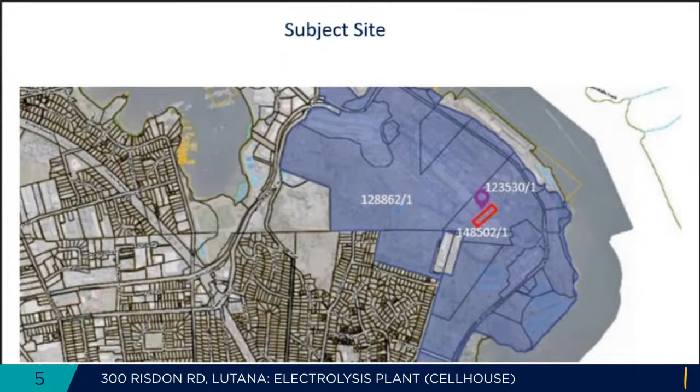So this shows the zoning. The zoning of the Nyrstar site is general industrial, and it's the same for some of the other large industrial properties, that's in purple. Then we have an area of green, that's open space zone land. That's also within Nyrstar, but it includes a woodland and some other open space zone land, which provides a buffer between the residential zoned land, in red to the south, and the actual Nyrstar site.

Where we have the yellow rectangle, that's a TasNetworks substation, and that's quite close to where the proposed cell house is. The use is classed manufacturing and processing. That's a permitted use within the general industrial zone.

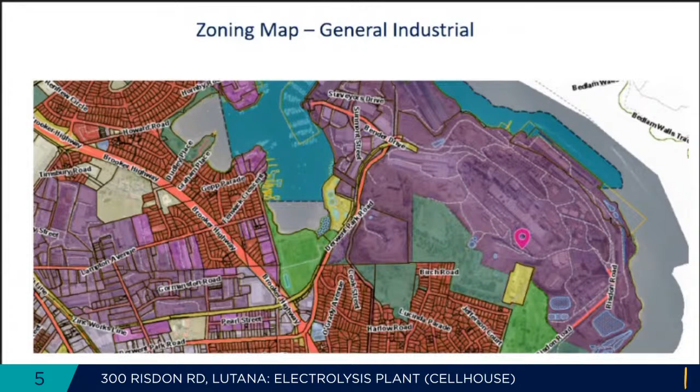Next slide please. So this shows the site plan. The yellow area, that's going to be the new cell house. And then we've got some associated development, which are cooling towers and a pipe bridge. The cooling towers are in blue and the pipe bridge is in pink.

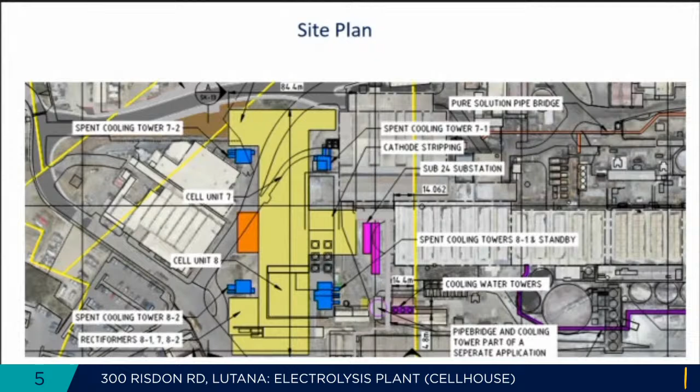So the application is discretionary because it's a level 2 activity. The discretion is under EMPCA. There's a small discretion in terms of the building height and the discretion in terms of car parking numbers.

So in terms of the level 2 activity, the environmental impact assessment report was submitted, and the application was referred to the Environmental Protection Authority for a level 2 activity assessment. So the board has assessed that component of the application, and they made a decision to approve it subject to conditions. That is the environmental impact part that they have assessed of the application on the 5th of April.

The council is required to attach the conditions of the board to any permit that the council would grant, and they are in the attachments, and it's quite a lot of pages that will need to be attached to the permit, and they are the environmental conditions that go with any permit.

We have a next slide, please. So I'll get now to the discretion of the height.

So the acceptable solution states a 20-metre limit. Part of the cell house will be 22.3 metres high, and the cooling towers will be 20.5 metres in height, where the acceptable solution has a 20-metre height limit.

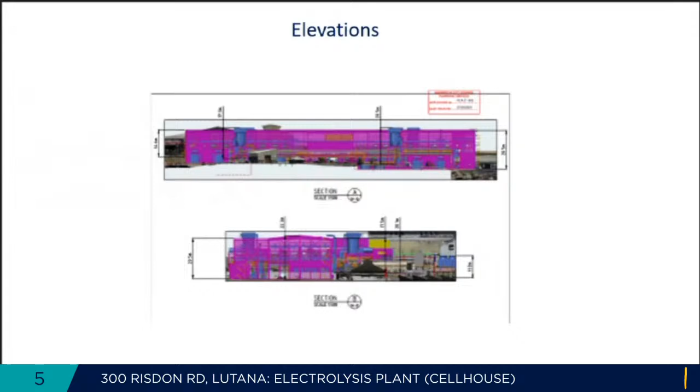So the height, actually, could we have the next slide? That might show it a bit better, please. So this is an isometric view.

So you can see where the development faces the existing higher buildings, that's where it is higher, and also in the middle of the roof where there's a pitched roof. And it starts at 11 metres where the adjoining building is lower, where it sort of faces Risdon Road. And so the narrow side presents to the water, and the higher side is adjacent to other buildings that are of similar height.

The performance criteria requires that we consider the bulk and the form of the building, separation from existing use on adjoining properties, and any buffers created by natural and other features. So in terms of the assessment...

It's considered that the additional height would not substantially add to the bulk and form of the building, and that the bulk and form of the building would not be excessive. Also, it's considered that the building would sit amongst other large buildings and would present with the narrow side to the river, which would minimise any visual impacts.

In terms of the separation from the nearest residential property, that's nearly 300 metres. That's quite a long way away from any residential property. And also for the third criterion, there is a buffer of open space zone land between the Nyrstar site and the residential development, which also minimises visual impact.

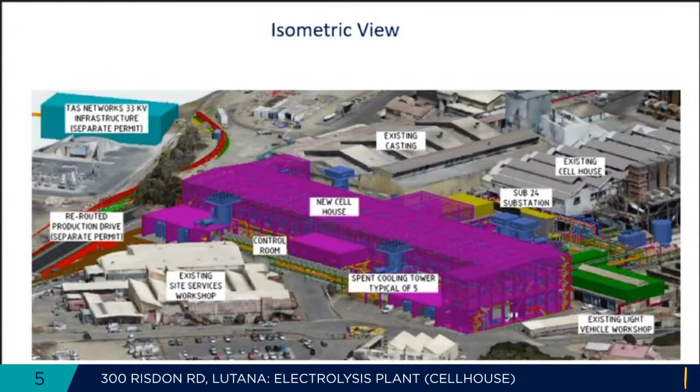So we did receive 2 representations. One of them was in support, especially in regards to the economic contribution that this new cell house would make and how it would prolong the life of the site at Nyrstar. So that doesn't really require any comment because it is in support of the application.

In terms of the visual impact, I've just talked about that in regards to the discretion. And in terms of the pollution, the EPA has assessed the component of the air pollution. It is noted that there will be significant environmental improvements with this new cell house because it would employ the latest technology, so air pollution would actually be reduced. But in any event, we don't really get to assess that part of the application because the EPA has assessed that.

Now I've just remembered I forgot to talk about a third discretion. There's also a car parking discretion as part of this. Because the new cell house has additional floor area, there will be 35 new car parking spaces required. However, eventually the old cell house will actually be demolished, but that will be part of a separate application. So for this new cell house, there wouldn't be any new employees because they'd just move from the old cell house and work in the new one. So in terms of demand generated, there wouldn't be any additional demand, and therefore it was accepted that a parking variation for this reason will be acceptable with the new cell house.

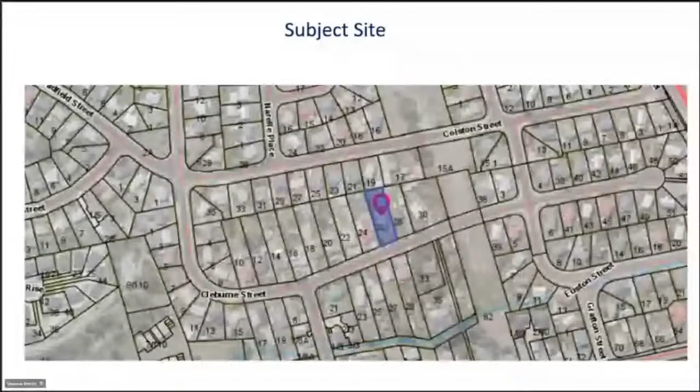So the site is located on the northern side of Cleburne Street. It's a rectangular property with an area of 1,045 square metres, so it's in a residential area. Can we have the next slide, please?

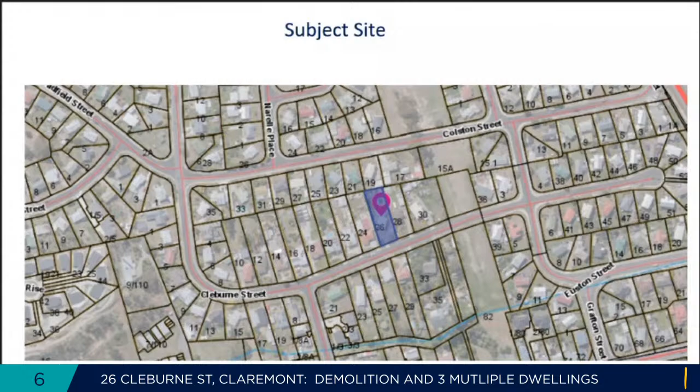This shows it a bit closer up. The existing site contains a single dwelling and several outbuildings towards the back. The site adjoins a single dwelling on either side. The dwelling on the east is about 2 meters away from the boundary, and the dwelling on the west has got a carport, or actually a garage, on the boundary, but the actual dwelling is just over 3 meters away from the boundary. At the back, there's just a couple of sheds in the backyard, and the area generally is characterized by single dwellings. May I have the next slide, please?

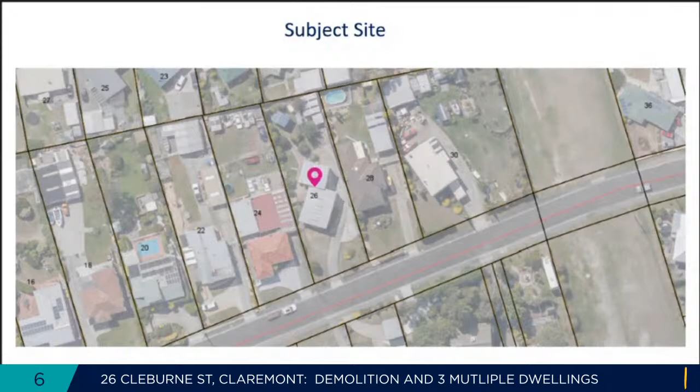The properties are within the general residential zone, as are the adjoining properties. So the use is residential for multiple dwellings, which is a permitted use within the zone. Next slide, please. So this shows the layout.

3 dwellings are proposed. The 2 at the front will be double story, and the one at the rear will be single story. There will be a driveway along on the eastern side. You can also see the outline of the existing dwellings next to the proposed development. The 2 higher ones will be sort of in line with the dwelling to the east, and where they have the backyard, there will be like a single story.

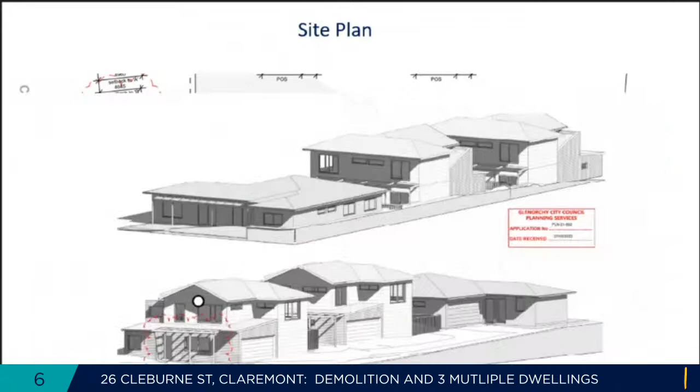So this shows a 3D perspective of the dwelling. You can see the shorter one, that's the one at the back. And those ones here that are facing the western boundary, in the top picture, you can see there's no windows on the side facing the western boundary.

The bottom one is where the new driveway is and all the garages, and it shows this is adjacent to the eastern boundary. So the second story sort of steps in a bit, and that will be 5.7 meters away from the common boundary. So that's quite a long way.

And like I said before, where the backyards are, there's actually just a single story unit. And again, you notice where it gets closest to the boundary, there's no window. Next slide, please.

So the proposal is compliant with all of the acceptable solutions except for a garage setback, so for setbacks for building envelopes for all dwellings. So the first dwelling, actually, sorry, could we go one slide back again? So you can see in the bottom picture, that's what you see from the street, and there's a garage on the side there, and the garage is sort of further forward than the second story.

Normally, a garage has to be 5.5 meters from the front boundary. This one, because the boundary is at an angle, it's between 5.09 meters and 5.8 meters away from the boundary. Normally, where there's a second story above that has got the same setback, then that wouldn't cause a discretion if the house had a 4.5 meter setback. But because the second story is further back, it doesn't set the building line. So this is actually causing a discretion.

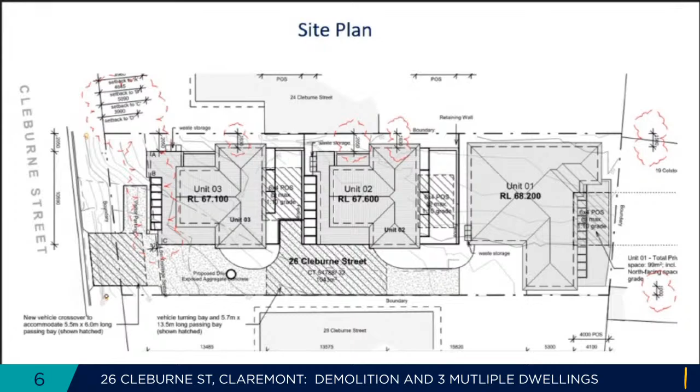Just through the Mayor, I just wanted to ask a question to clarify more for the public also. Just to ask perhaps Sylvia to speak to the streetscape compatibility and character. I understand it fits within what's prescribed in the Act and our own guidelines, but I'm just curious as to the interpretation. Is it what's already built on the street considered against that, or against what's prescribed in the Act?

It's what's within the planning scheme. In some of the zones, you do actually have objectives for local areas. Within the general residential zone, there's no such standard. But in terms of what the streetscape's going to be, it will be shaped by all the different planning scheme standards. So there's not a particular thing to look at, we're not looking at the current streetscape, because there's no standard that refers to that. But because there's certain planning standards, the outcome of applying the standards will result in a certain way that the street's going to look like.

It's just that, I suppose, this planning scheme is fairly new, but even prior to that, the density and the height were the same as what they are now. So it's going to take a while till we see on the ground a change in the streetscape that's being shaped by the current planning scheme. But there's no standard to consider the streetscape in this instance. There may be if there was a heritage building involved or something like that, but there isn't.

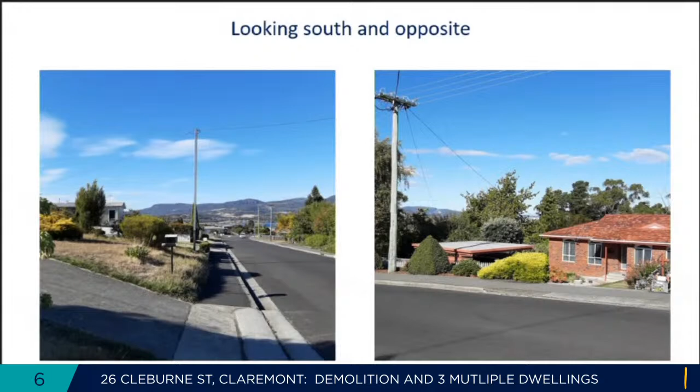Thanks, Sylvia. Alderman Carlton. Thank you, Mayor. So I understand the reason why this application is before us is because of the garage and the issues surrounding the setback. All of the other aspects have already been considered under the planning scheme and meet the planning scheme. So we are really just having a look at the garage today.

But I did want to have a look at the diagram again where it shows the west wall, where there's no windows, overlooking number 24. So that's been deemed to meet the standards under the planning scheme. But I'm wondering what might happen in the future if the owners or whoever might be in that area might want to put windows in there. So what sort of protections, if we do approve this application, are there to ensure that that remains the same and windows don't appear on that west wall?

Yes, that would cause a discretion, which then would require a discretionary planning permit, which would go through the same process again, where we'll be looking at the discretion and neighbours who get sent a letter and could object to it. So normally, even if people didn't know they had to apply for a planning permit, if they put in a building permit or a lesser documentation for building, we will pick it up and make them put in a planning permit application, and then again people will be able to object to that. So that would be a separate process, but they wouldn't be able just to do it without approval.

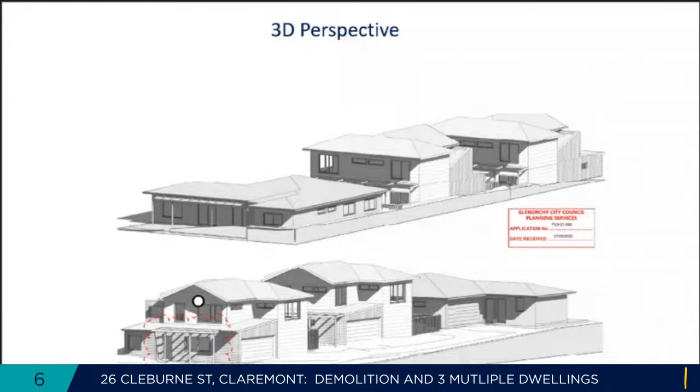All right, so if someone did decide to put windows in, they would have to go through a separate process in order to get approval for that? Yes, they would, because it would then trigger discretion. Because, on the one side there are already windows, but on the other side where there aren't any, that would cause a discretion because they wouldn't be 3 meters away from the boundary. Okay, thank you. Thank you, Alderman Carlton.

Okay, thank you, Sylvia. We do have, I don't believe we have the applicant here, but we do have some representatives here. So, Mr. Strang, would you like to speak? You have 5 minutes to address the authority.

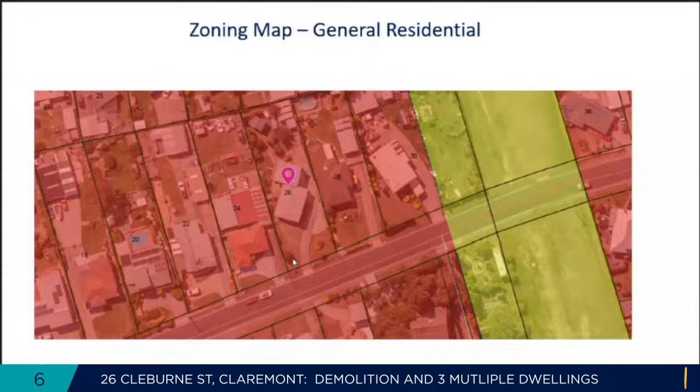So our driveway goes like that. I understand your concern. What we're hearing from our planning officer and from our development engineer's report is that it's not something we can consider as a planning authority, although it affects your amenity and capacity to use your driveway as you have been. It's not something we have discretion over. The planning scheme allows for properties to be built that far forward on the block of land, so it's not something we have discretion over.

Thank you, Mr. Strang. Anything further from you? Yeah.

The previous owner removed a lot of soil out of our boundary, which is where our garage wall sits, and it's got about a 20-30 mil gap. It's pulling away from the wall, she's going to come down, it's only a matter of when. Because they've moved all the soil from down the side of our boundary, which I told the previous owner not to do, and now it's starting to tip over.

Mum and Dad were away, so I've got to get the engineer out to have a look at it, because it's a major problem and it's going to come down, it's just a matter of when. That's on our boundary - the neighbouring property removed all the backfill, the dirt on their side, supporting our wall, so it's no longer there. The wall was straight, it's no longer straight, there's a crack right through. It supports the wall and it's tipping over. She will come over, it's only a matter of time when it comes over.

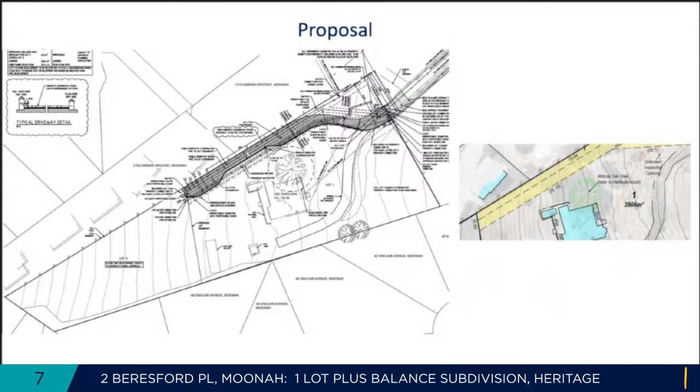The subject site is to the east of Beresford Place and is at the end of the road as well. The site is relatively large for the area, with a total lot size of 5,792 square metres, and Main Road Moonah is just under 400 metres to the east of the site.

The surrounding area is predominantly residential and lot sizes are consistently around the 600 to 800 square metre mark. To the northwest of the site, there is a multiple unit development with 5 multiple dwellings, and to the northeast of the site are a number of similar multiple dwelling developments also along Beresford Place.

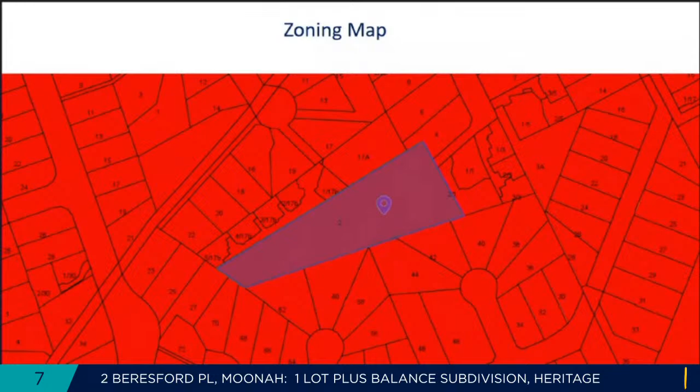As part of this application, a heritage impact assessment was provided, which was put together by Graham Corney. So there are 2 discretions.

The first one is from the general residential zone, so 8.6.1 lot design, performance criteria 2, and the application is relying on this performance criteria because both of the new lots have frontages of less than 12 metres.

The application in this case, though, is considered to comply with the performance criteria. Firstly, Lot 1 is provided with access to Beresford Place with a 6.25 metre wide frontage and access way, and Lot 2 can be accessed by a right-of-way easement and has a width of 6.5 metres at the point at which the Lot 2 boundary begins.

There are no major topography restraints, and the topography of the site does allow for access to both of the lots. The frontage width will allow access to service connections and vehicle access to both Lots 1 and 2, and the right-of-way carriageway will ultimately provide access to Lot 2 as well, and the services along there as well.

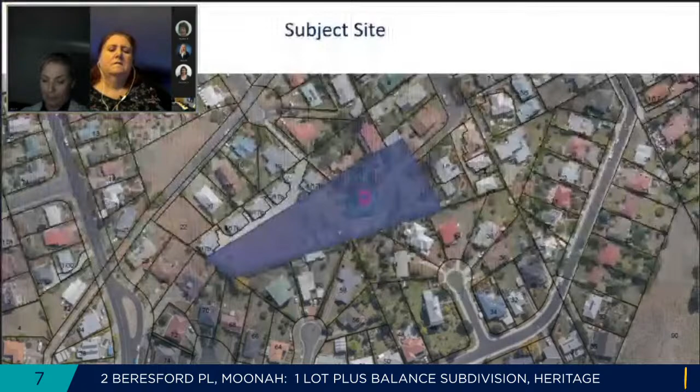Sorry, through you, Mayor. So they'll have to reapply for a road opening permit, which will address those issues. So yeah, for any work at the access, they have to apply for that.

Further question, Mayor. When they apply for that type of permit, is that communicated to the neighbours, or how are the neighbours advised of that process? Are they part of that process as well in terms of managing that? I don't believe so.

Thank you, Alderman Ryan. I just had a comment. I kind of agree with the Representor with regard to the gate, although it's something we can't consider with this application, but it might be something to keep in mind in case of another development application down the track, because it could become problematic. Maybe your idea of putting the gate further up might be a good idea, because it logically should open downhill. It's much easier to open a gate downhill. But it does create problems for access. It could do, so maybe keep that idea.

Yes, and maybe in the future you might negotiate if there's a further development application down the track. It's happening now, but it's just sporadic visits to the property at the moment - mowing and stuff, so it hasn't been a big problem. But with more traffic and more construction going on, it could be really annoying. Have you tried to liaise with the developer directly?